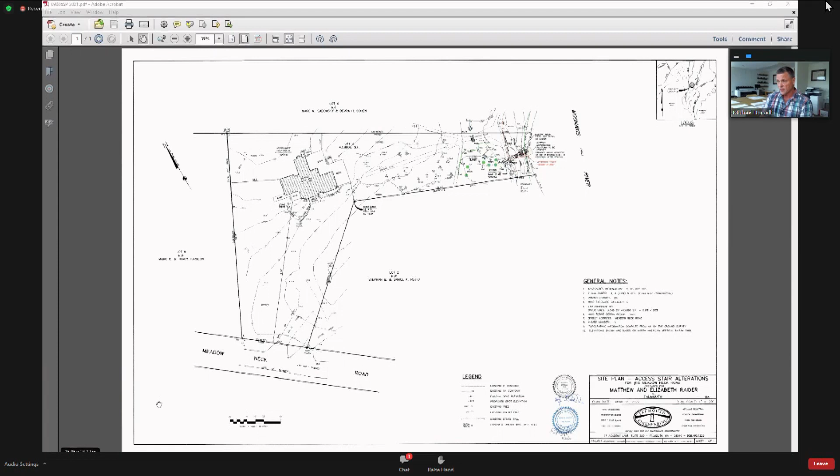The property in question is number 10 Meadow Neck Road. It has water frontage on the Moonakis River. The resource areas include land under the ocean and land containing shellfish. There is a band of salt marsh, which I will point out to you.

There's a narrow band of salt marsh here. There's a sloping landform that meets the definition of a coastal bank. The top of bank is delineated here in red. There's land subject to coastal storm flowage from the blue line seaward. This area on the waterfront edge is also within an area of critical environmental concern.

The balance of the site is just over an acre.

There's a single family dwelling here, driveway, parking, all outside of jurisdiction.

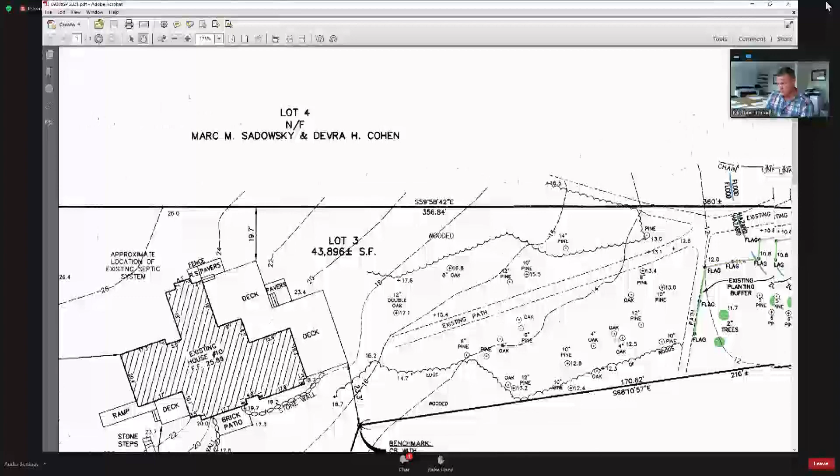Back several years ago, the Conservation Commission issued an order of conditions. It allowed for access stairs from the top of the coastal bank, at the edge of an existing path down the coastal bank, to just the edge of salt marsh, not into the water, because anything seaward of mean high water would require a Chapter 91 license, and Chapter 91 licenses are not obtainable if it's also an area of critical environmental concern in Falmouth, because we don't have a harbor management plan at this time. So the original application was just to gain access to the water for launching kayaks, etc.

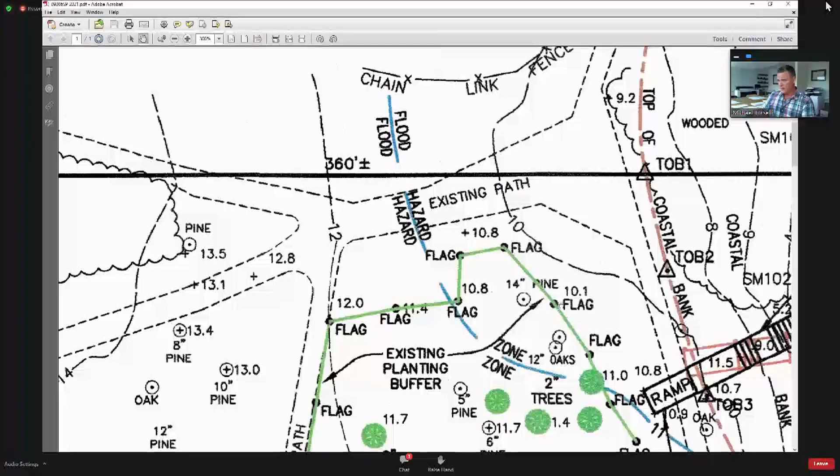The property changed hands. There was no certificate of compliance. We inspected the site for compliance and found deficiencies. We were hired to hopefully get permission to correct the deficiencies. So what I'm showing you here is the permitted alignment in red, approved stairs shown in red, and what was actually constructed in black, including this shaded area that was a platform, unpermitted.

I met with staff on site. We went over it. What I expected to be the result, and what we were anticipating having to do, was make the structure the same size as what was approved, do not allow it to go beyond mean high water, and certainly not to have this platform.

So we're proposing to remove this platform. There's some fringe edges of salt marsh that after this is removed would have to be planted to restore the edges of the salt marsh. This ramp at the edge was not approved, so we're proposing to remove this ramp. That's what this note indicates. And that leaves us with the same size structure that was approved, which is the stairways and the landing at the top. It was just built at an angle from what was the actual approved orientation.

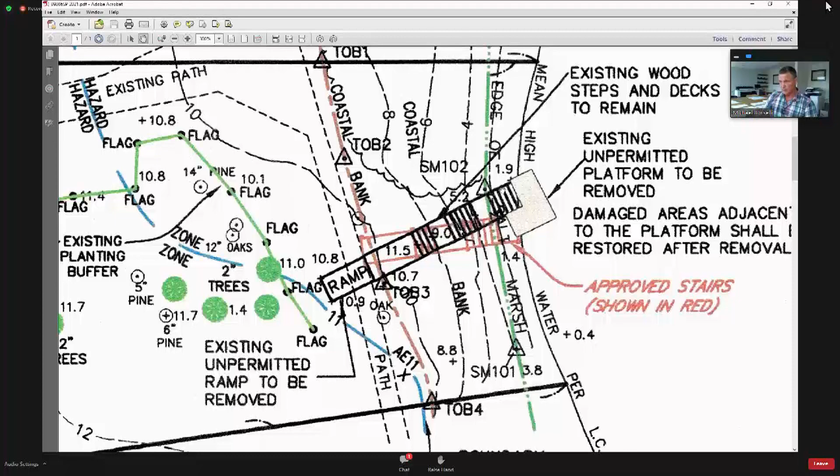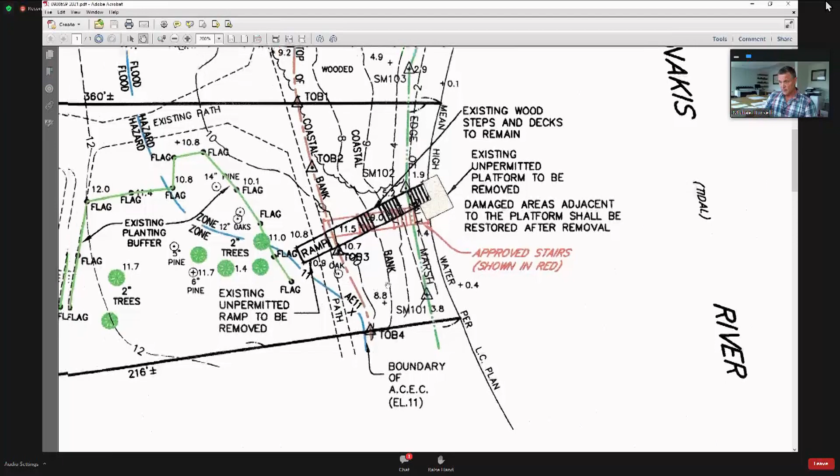So we're hoping that you'll allow us to continue to keep the portion that's the same size as what was approved, but in a different alignment in place, and to remove the portions that were not approved. I think that sums it up, and I'm happy to answer any questions.

Jen, you want to begin? We don't have any questions, Mr. Chairman. The only thing the board, if the board wanted to add some extra mitigation for the ramp, Mike, it's because the ramp extends landward, right? Yeah, the ramp extends landward. Do you know what the square foot difference is from what was approved to what was built?

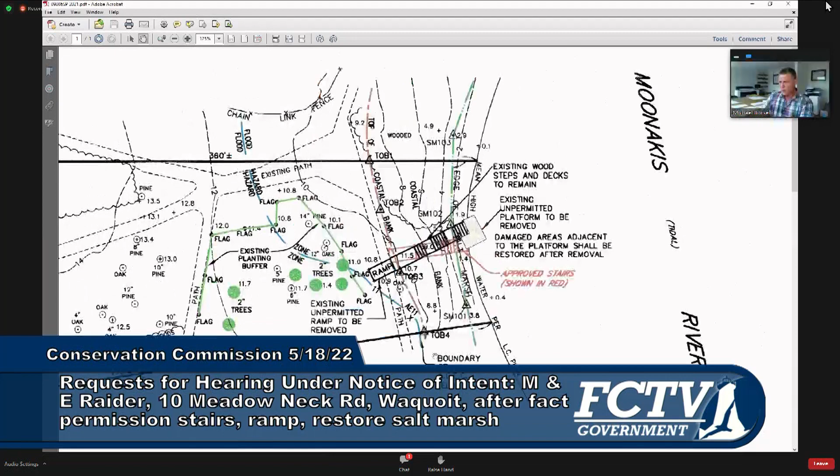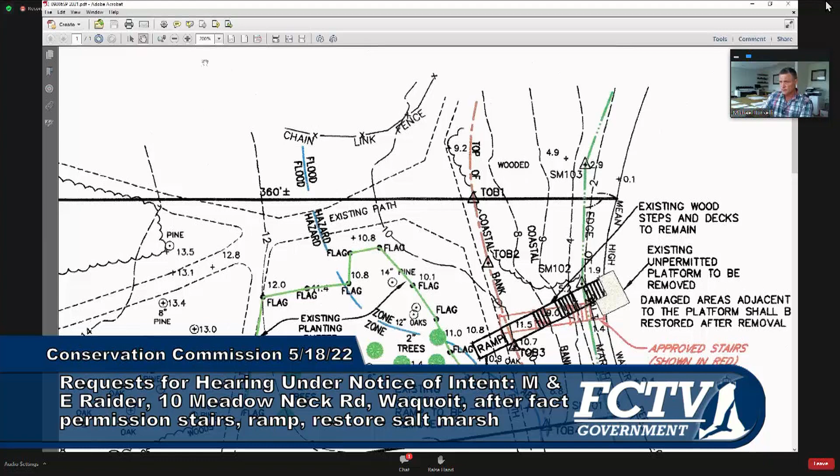If we remove the ramp and the platform, we're effectively the same square footage. So we intend to remove that ramp. You certainly do? We intend to remove this ramp and certainly the platform. Okay, excellent. Thank you. I don't have any questions at this time unless Alyssa may have something. I don't have anything. Thank you.

Okay, so Jen, are you suggesting that they can keep that landward ramp? I would say that if they propose to keep the landward ramp, there should be mitigation attached to it. But at this time, Mike just said they're proposing to remove it. Right, we don't have any intention to keep the ramp. Okay, fair enough, just looking for clarification.

Does this project otherwise meet standards for a certificate of compliance? I mean, it's in a slightly different configuration, but if the board were to approve this, then we could issue compliance on the old order. And then, once everything is removed, issue compliance on this order. Okay, thank you. No worries.

Comments, Betsy? Yeah, so I have no questions, and there'd be no sense to change the orientation right now. That would cause a lot more damage. I mean, it's a good solution. All right, Kevin? I agree. What's there now, with the ramp taken out, is fine. I think it's a clever solution.

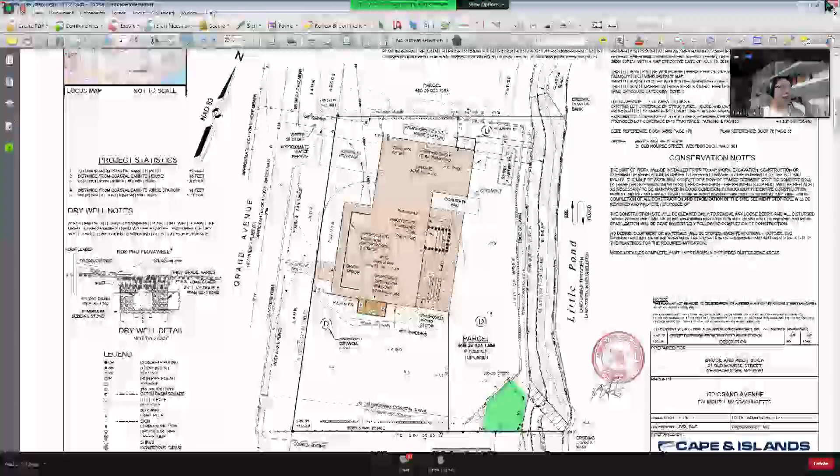So yes, this is the house in the orangey color, and I'm going to draw over where those resources are that are most restrictive. There's an eroding coastal bank to the north on the abutting property, and an eroding coastal bank to the south. The 75-foot buffer zone A's come out to be at this location, which happens to fall within the layout of Grand Avenue, so the entire property is within buffer zone A. The raising of the roof happens at this location of the existing house.

The garage roof will stay the same. There is an existing landing and stairs on the back of the house that's going to be relocated to this location. In terms of footprint, it doesn't gain or reduce because it is an existing deck beneath those stairs. At this location, we have the proposed cantilever deck, and at this location is the proposed rinse station. Overall, there's a proposed 43 square feet of increased development in buffer zone A.

So we're proposing 130 square feet of mitigation plantings at this southeasterly location. We chose this location because it is closest to part of the erosion that's happening, which is also within this subject property. We did receive staff comments, and staff noticed that a tree had been removed somewhere in this location. We consulted with the developer and the homeowner; the homeowner just purchased the property last October and has not done any cutting on the property, so that tree removal must have happened by the prior owner.

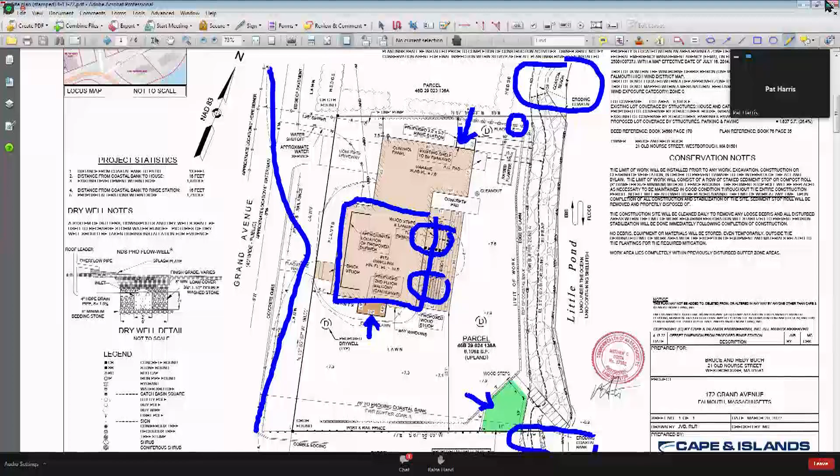So we have a proposed limit of work along the north, east, and south property lines. In addition to the mitigation required for this project, the second improvement is collecting all the roof runoff downspouts, which currently discharge to the surface. We're proposing dry wells to collect that roof runoff. There is no septic system on the site; the property is serviced by town sewer, so there are no changes regarding septic.

Thank you, Raul. Jen?

Staff feels there are no trees at all on that property, so a tree would be beneficial there, Raul, but it doesn't have to be placed where the road and coastal bank are. It can go somewhere else in the buffer zone, perhaps down in the area where you're proposing the mitigation.

I have two additional points. I noticed the vegetation along the coastal bank is being trimmed, so just a note to the homeowner that the mitigation planting is allowed to grow to its full, mature form. Also, since we're working in the velocity zone, note that we're working with a 43 square foot increase, as we've had denoted on the plan the last couple of times for future reference. If that's something you can do for me, that would be great.

So Alyssa, are you looking for a revised plan showing that 43 square foot increase? Sure, Raul, if you could send that over to us, that would be great. Just a comment: the entire property is in the velocity zone, so the table showing the 43 square foot increase implies everything is in the velocity zone. Jamie, may I say something? Raul, I'd like it specifically called out, because you're only allowed a 200 square foot addition in the velocity zone, and this is the first bite of that apple. Understood.

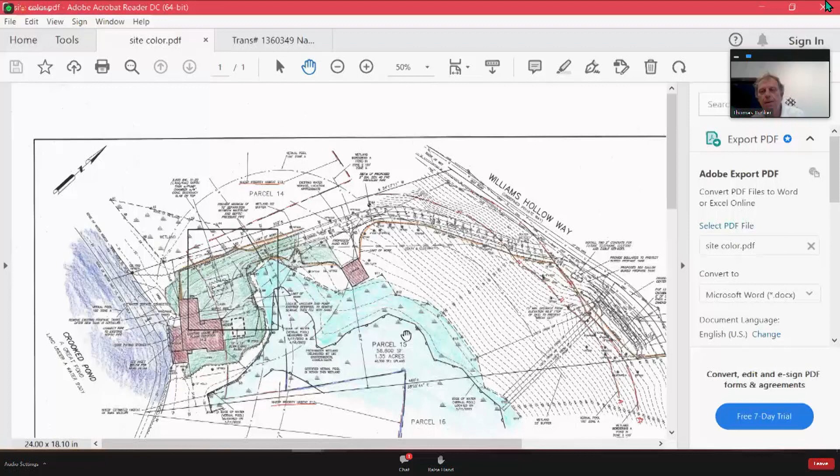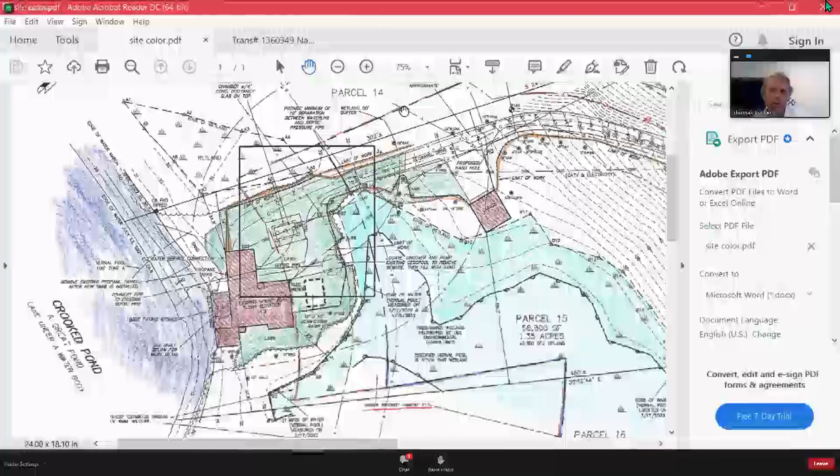So I put it on the plan that this wetland would be considered to border on Crooked Pond, which is in a Zone 2, so it has a 100-foot Zone A, which I've drawn up further inland up through this location. Currently on the plan, nobody knows exactly where the so-called existing septic system is.

It's somewhere out here - could be an old steel drum for all we know, but it was pointed to as being out here somewhere by the owner. Probably never been pumped recently or anything.

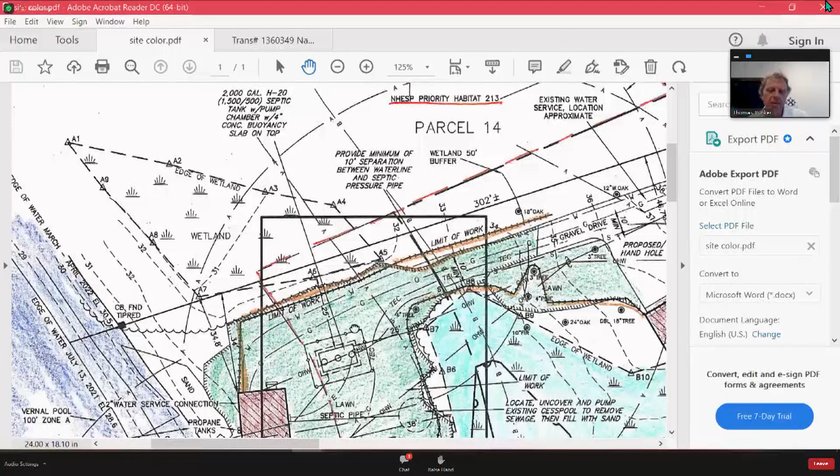So what we're proposing is to discontinue this, pump it out as best we can. I'm sure it's down in the groundwater. Pump it out, fill it, decommission it, and put in a 2,000 gallon H20 1500 gallon septic tank with a 500 gallon pump chamber in one unit right here.

This will depend on the season - if they do it now, it'd be quite a bit in the groundwater. If they waited till July, the water is about 2 or 3 feet lower. In July, when we first came out here, the elevation was 28.6. In March and April, it was elevation 30.5. You can see how the elevation of the pond and therefore the groundwater changes. The best time to do it would be in the summer, when the groundwater would be lowest and there'd be the least amount of pumping into a dewatering basin.

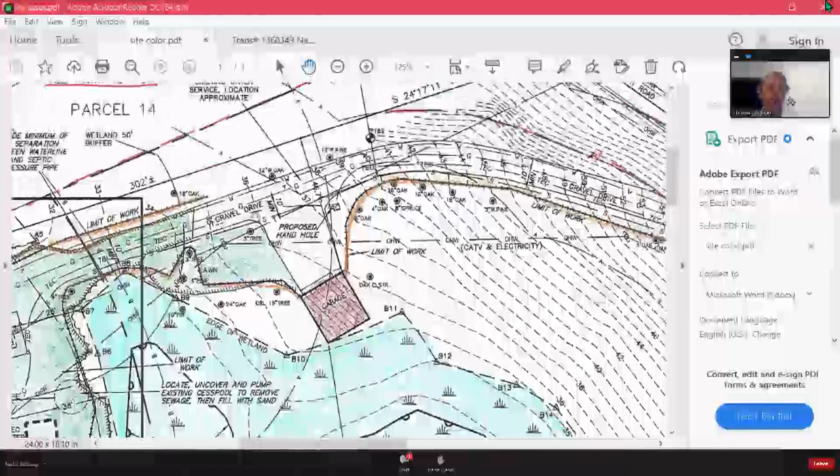There are no plans at the time to change the house at all - this is purely a septic upgrade. From the pump chamber, it's a 2-inch pressure PVC pipe up the driveway, and then over to here.

There's a distribution box up near Williams Hollow Way and a leaching area in this location. The leaching area is 110 feet from the vegetated wetland, and we show the 100 feet to the limit of work, or 100 feet to Zone A. The septic system is 110 feet from the vegetated wetland, and the leaching area is 118 feet from the vernal pool. So it meets the Falmouth wetland regulations requirements for separation, both horizontal and vertical, and the Falmouth health regulations for the placement of a septic system.

This tank, by the way, the reason we have it 25 feet from the wetland is that's a Title V regulation - a septic tank must be 25 feet from any vegetated wetland or water body in that location.

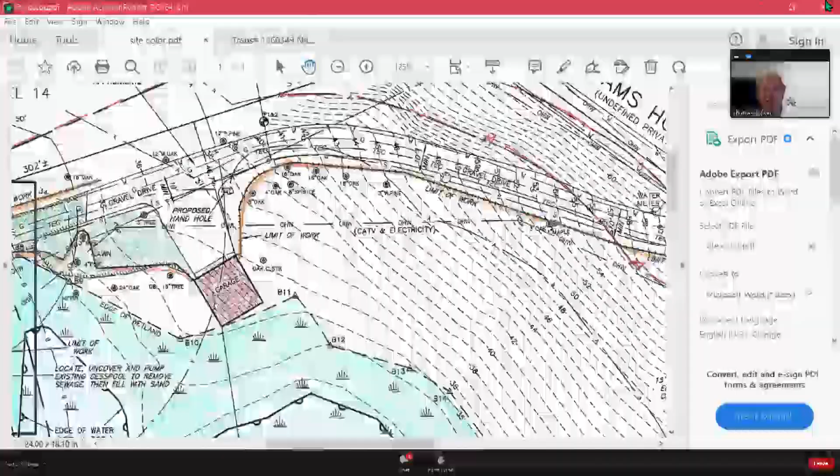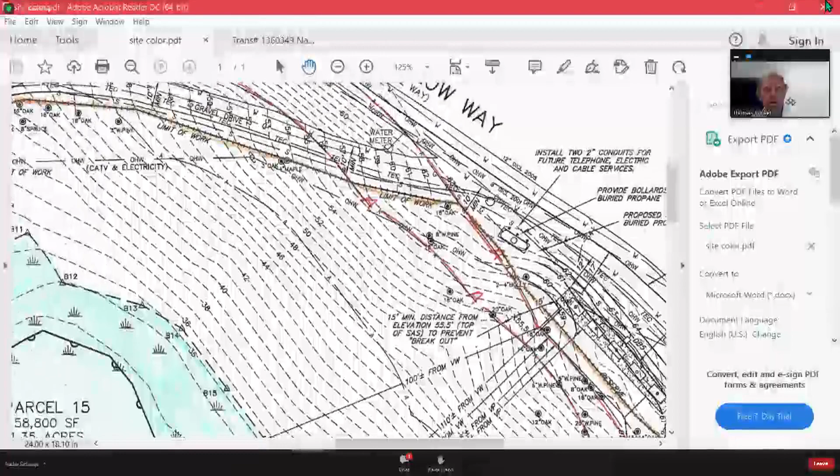When the road is being dug up for the pressure line, they also want to put in conduit from this utility pole here so they can run electricity underground. When that is done, I suppose we'll file another RDA just to take the wires down and remove the poles, so the trees won't get in the way of the wires and the wires won't get in the way of the trees.

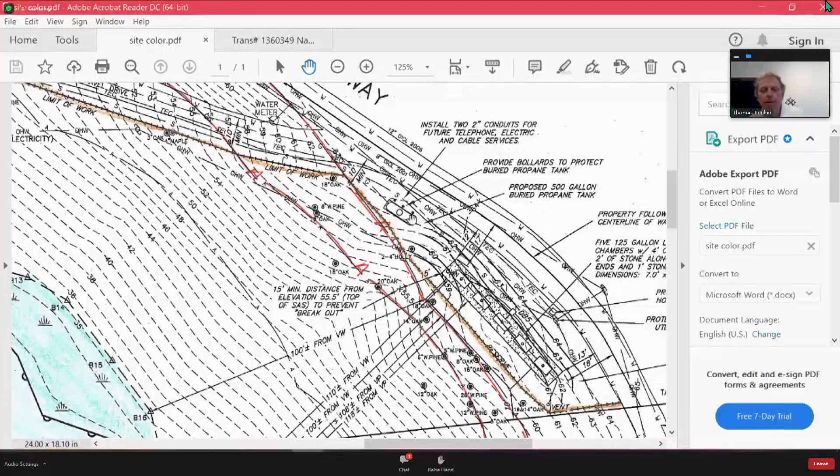And then another item up here by the road is to put in a 500 gallon propane tank buried, because it's too difficult to find a place for a large tank, and it's too difficult to get propane deliveries down that driveway. So I want to put a propane tank up here, protected by a few bollards from any traffic mishaps down there.

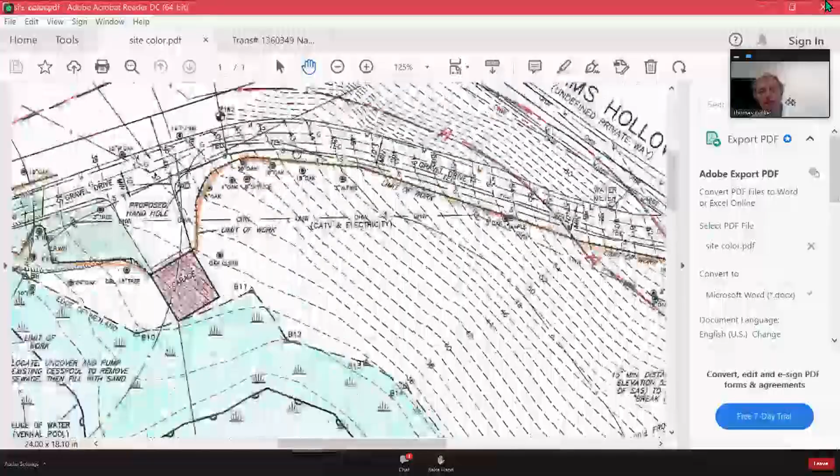So there'll be the septic pipe, a conduit for electricity, and the gas line running down all within the existing driveway. There's no intention or plans to remove any of the trees, and as stated in the narrative, if any trees get too damaged or removed, they'll be replaced in kind, and the surface of the roadway will be put back as good as it is now, or better, as far as a gravel surface to drive on.

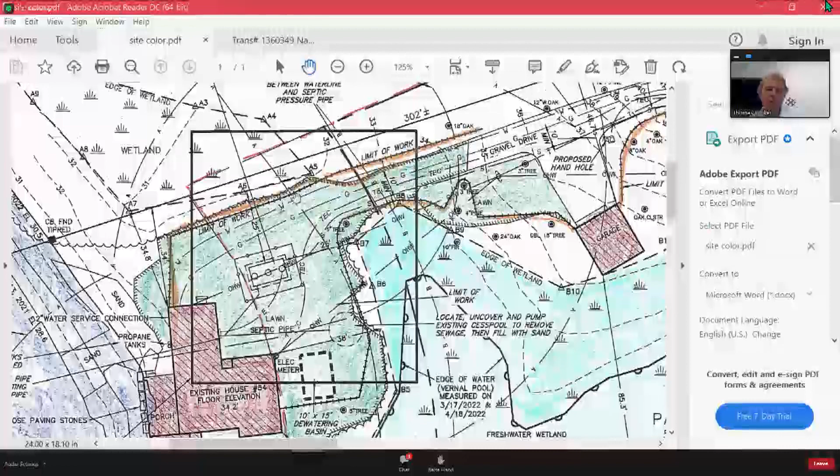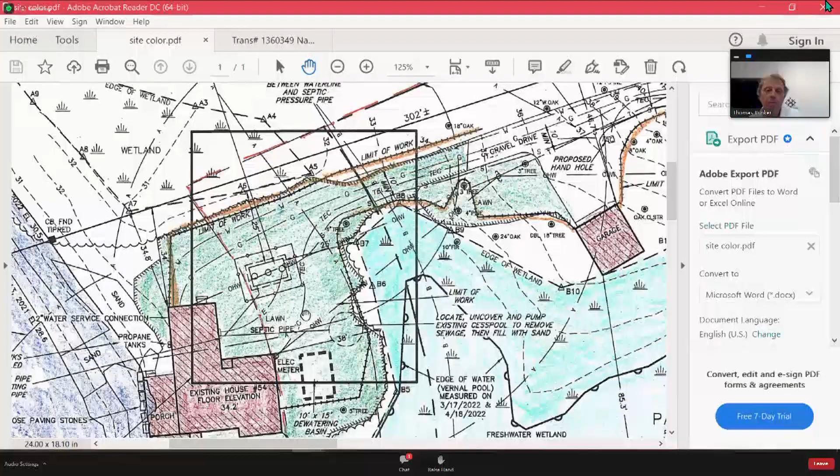And notice that all of this is grass - it's not gravel or any other surface. So the grass surface will be reinstituted where it is now grass. There'll be no increase in impervious surface or surface that will not support vegetation. And that's the proposal.

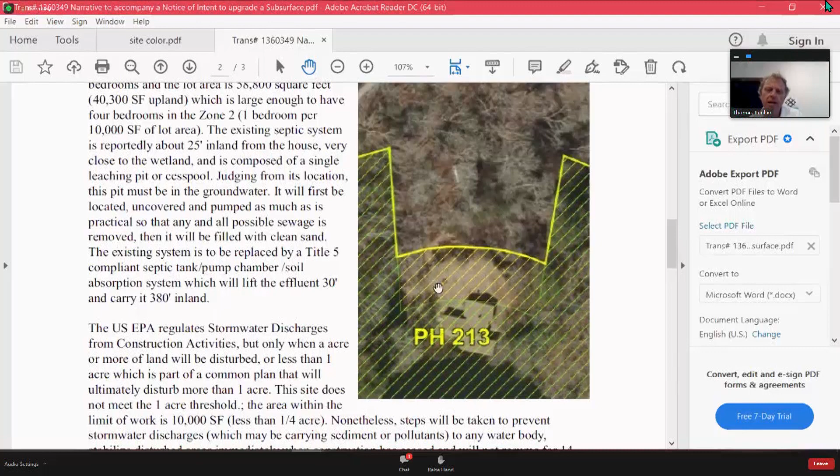Another oddity of mapping - the priority habitat, Crooked Pond, is down at the bottom of this. So the septic tank and leach pump chamber going in the lawn here within the priority habitat, but all the other work will be coming out of the priority habitat and the system up there.

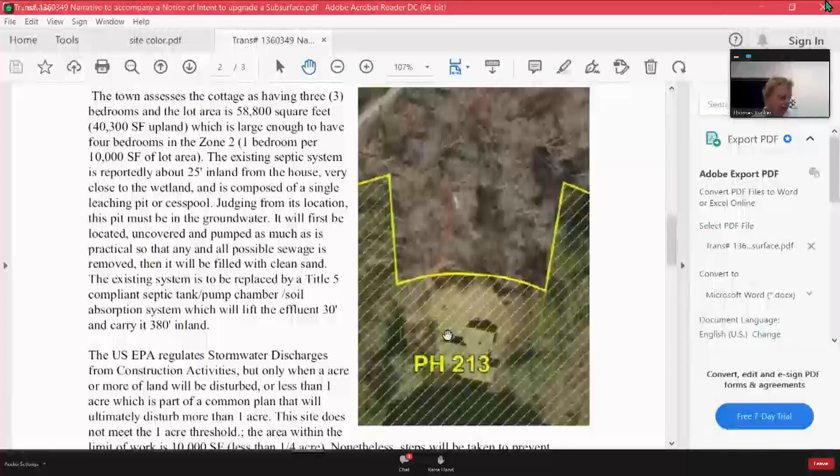It does not have to be, we sent the NOI to the natural heritage people, but it is exempt from review because it is upgrading a septic system within previously disturbed area within the habitat. And so I'll take that down and take any questions.

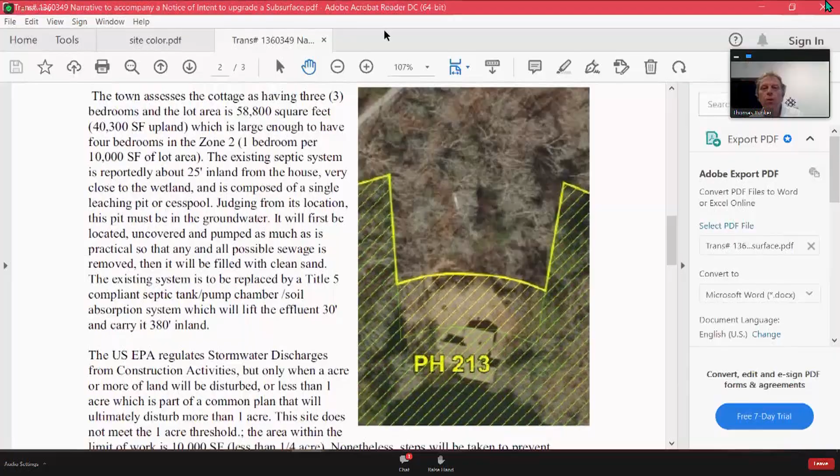Sir, Jen? Yes, Mr. Chairman, I'm trying to promote more. Yep, hang one second, maybe it'll work now. The only concern I have - I don't have any questions - the only concern I have is the placement of the tank. I understand the constraints you're in, Tom, and Tom and I spoke about this. When this house is...

redone, your regulations are going to require the house to be pulled 25 feet back from the water's edge, land under water bodies. You can't move any closer than the present primary structure or 25 feet, whichever is furthest. And in this case, 25 feet is going to be further from that wetland. So I just want to make sure, Tom, that the tank is positioned in a way which will allow this house to be moved back.

It can be, well, two things - yeah, we'll cross that bridge when we come to it. The house is now and will be on posts, which we can put close to the tank. But I also think your regulation does say that an expansion of the structure cannot be closer than 25 feet - it doesn't say that the existing structure has to move back 25 feet. But again, we'll cross that bridge when we come to it and make sure it's done according to regulation.

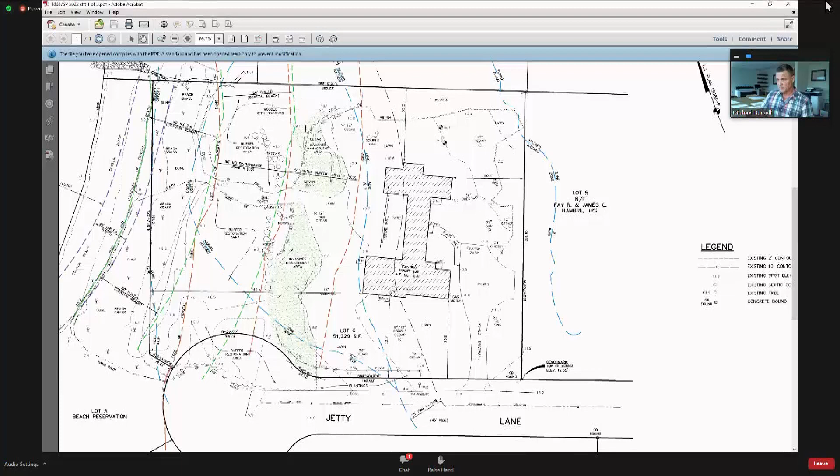All of the work that's proposed is more than 100 feet from all wetland resources with the exception of land subject to coastal storm flowage.

Now the proposed plan shows, for your reference in red, the existing house. I also want to point out where the 25-foot Falmouth designated velocity zone line is. The new house has been designed to meet your standards for construction in land subject to coastal storm flowage.

It does that by first proposing the house itself outside of all FEMA designated flood zones and the Falmouth wetlands bylaw flood zone. A section of the deck is within the 25-foot Falmouth designated velocity zone, but no portion of the structure is in any FEMA designated velocity zone.

The house was designed specifically to shift it back so that the main body of the house proper is in the A zone. The deck and house will be elevated, so the first floor is 1 foot above elevation 16 minimum, or what would be elevation 17. The deck is open pilings with nothing underneath, because a portion of it is in the velocity zone.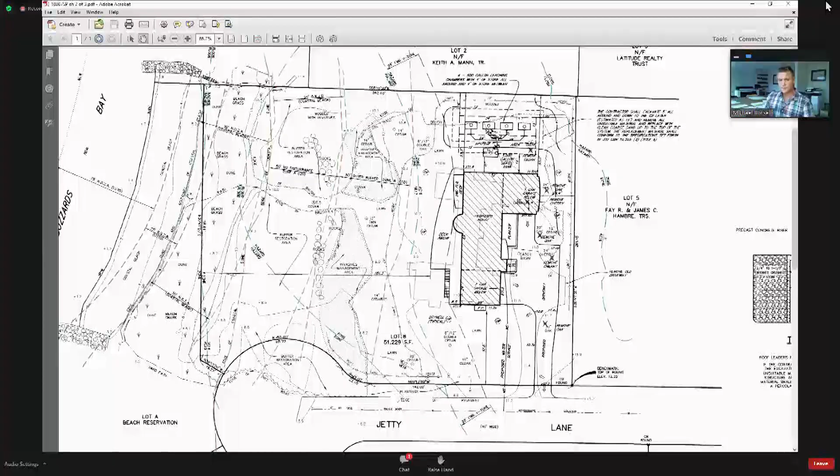I think that sums up my presentation, and I'm happy to answer any questions. Thank you, Mike. Jen, I believe Mike answered the staff questions unless Alyssa has something else to add. I don't. Thank you for the clarifications, Mike.

Mike, I think you alluded to this, but was there a certificate of compliance issued for the invasive work? There was one filed for, but it's pending still. It was just recently requested.

Jamie, I think Alyssa, correct me if I'm wrong, we're still working on trying to meet Crawford at the site. I have met Crawford. We discussed two areas where the plantings weren't doing well, so they're going to remedy that and let me know when that's taken care of. Okay, you're working on that. You don't see there's any issue with it. Okay, good, thank you.

All right, Maury, we'll start with you. I just had a couple questions and Alyssa answered one of them. But obviously this house is going to take some time to build, so the plantings, if they're not doing well now, we should make sure at the end of this project they're doing well still. And we should put the first floor elevation on the plan. It's not a big deal, but it's not on your plan, Mike.

Okay, and the 30-inch oak by the driveway, there's no way you can configure to not lose that 30-inch oak? It's like the nicest, biggest tree on the lot, I know you're trying to swing into the driveway. I'm going to share my screen again briefly, if that's okay. Sure.

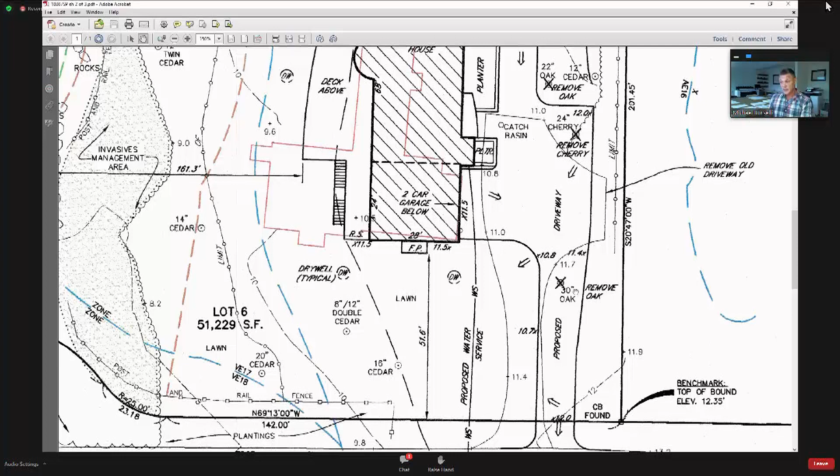I'm not in a position that I can answer that, but my client's in the audience, Mr. Steve Kasuk. That would just, if you can do it, I mean, I know it's in the flood zone, but it's a beautiful tree and will give a lot of shade for that house. So thank you. We'll consider it, we'll consider it.

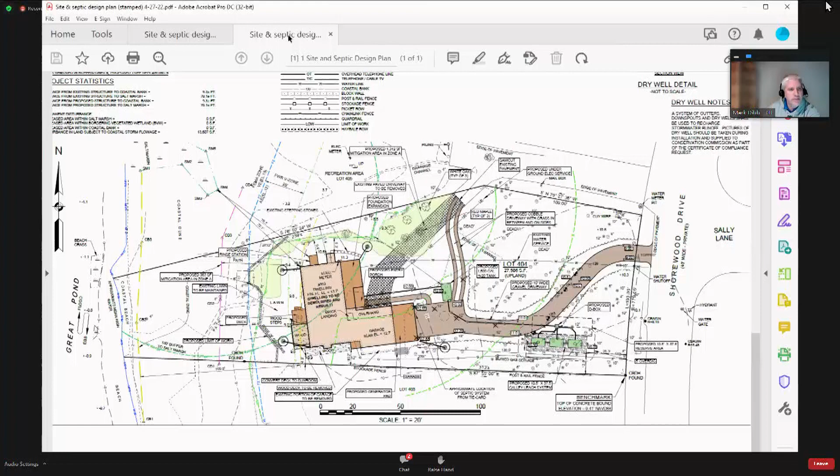And so we resubmitted a revised plan. This is the old plan. We resubmitted an updated plan where we've made a pretty significant change regarding use in the A zone.

This is the A line. We removed that driveway connecting the existing access over to the new access. So we removed that cobblestone driveway, all the work associated with that, which was pervious area around it, as well as the impervious cobblestone driveway. So we no longer have any trespass of vehicles in the A zone.

It all comes off of Shorewood Drive now. And what that did was reduce mitigation requirements, as well as we revised mitigation to now encompass areas of the existing drive that's being removed and areas of lawn, resulting in almost a removal, well, definitely a removal of all impervious hardscape in the A zone. There is still some new proposed structure in the A, but it's a net reduction in the A. We've provided the updated mitigation area.

One thing we did add to the plan are these two small areas of invasive removal. The invasives are overtaking trees and doing what they do in that area. So we have added that in the appropriate notes for that. We do not have a contractor at this time, but there will be a qualified professional to do that work. We can notify the commission once we do have a contractor. And I'll give it off to the commission for any questions.

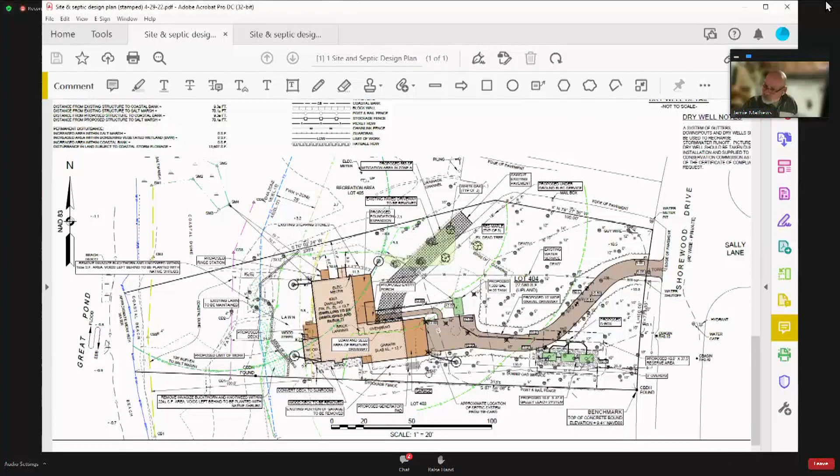Jen? Yes, Mr. Chairman. Hi, Mark. Thank you for those changes. I think Alyssa had one other question regarding the invasive species. Will you be restoring that area with the same species as the mitigation? Yes, we will be. Okay.

Okay, and we'll make a special condition about language regarding the qualified contractor. It will probably have to be approved at least at the staff level. That's all I have, Mr. Chairman, unless Alyssa has something else to add.

I just had one thing, and my apologies if I missed it. We did receive a letter verifying that the existing foundation can handle the weight of the second story, and that is the same individual from the previous hearing when we were going through the whole structural civil thing. So I remember that Gary has verified that this individual is qualified to make that assessment. So just wanted to let everyone know. Thank you.

Okay. All right. Commissioner comments, Pat? No comments. Thank you, Mr. Chair. Peter? No additional comments except for I congratulate Mark in getting all the concerns worked out.

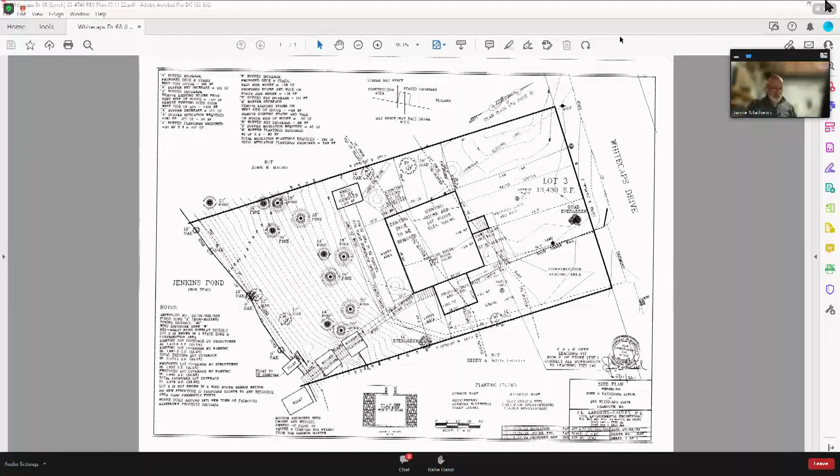Uh-oh. Okay, I stopped sharing, Jack. It's okay, it wasn't you. Yeah, I thought I lost you. No, I'm the one controlling the screen.

I have a couple of questions, Jack, because I'm confused when I looked at your plan and then I'm looking at the architecturals. A couple of things: you're not raising the whole structure, because if you look at the existing house pictures and the architecturals, it's completely different window sizes and everything in the front. So is the whole house coming down, or are you just doing the addition?

They're going to do a major facelift of the whole house, but the deck is to be removed and the first floor is going to be extended. Is there going to be a second floor on the house? No, no second floors. What you're looking at in the architectural plans is a Scrivener's error because the designer has said it's a first floor. He notes first floor on two sheets, so that's clearly an error on his part.

May I interrupt? The section shows it as a second floor. Yeah, the plan's wrong because you're not proposing a floor addition, correct? I'm sorry, say that again please. You're proposing a second floor addition? I'm sorry, yes, I'm confusing first and second floor. You're absolutely right, there's a second floor addition. I apologize about that.

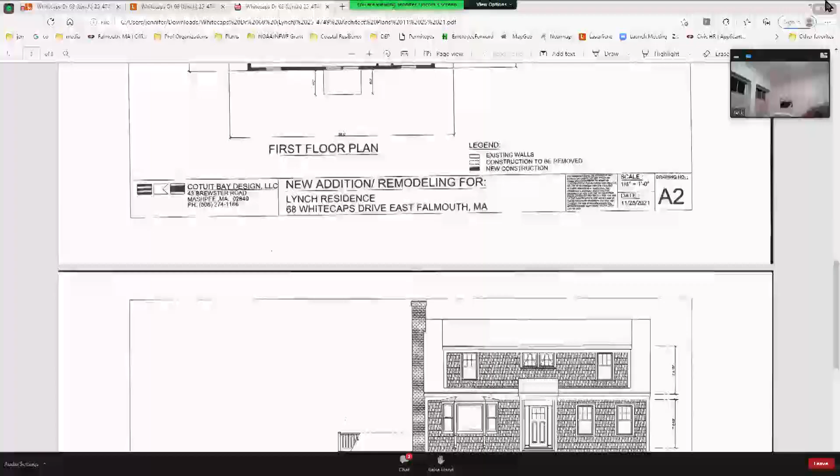Yes, okay, those are the first floors. So this is the rendering, so that's what it was like. Jack, watch my screen. So this is what we caught, the different orientations of the windows that were there.

So down here, that lower level, that walkout level, is that going to be a full foundation? Is that just going to be like a frost wall? It could be either. Actually, it needs to be a frost wall. I should probably let the architect explain that, but as a minimum it should be a 4-foot frost wall. Is the architect here? No. Okay.

I just want to know how much excavation is going to be done on the property, Jack. If you've got this existing basement right here, are they taking this wall out, making a frost wall and just making this one room, one level? Or is this going to remain a wall and this is just going to be a room?

This is the way I envision how it has to happen. I think they have to take the deck down, and in the same footprint, put in a 4-foot frost wall, which will be about a foot above finished grade. You then build on top of that frost wall a traditional wooden wall, which will go from the basement level to the underside of the first floor extension, or the former deck. That's how I see it. And then they would raise the roof over the existing main house and put a second story on.

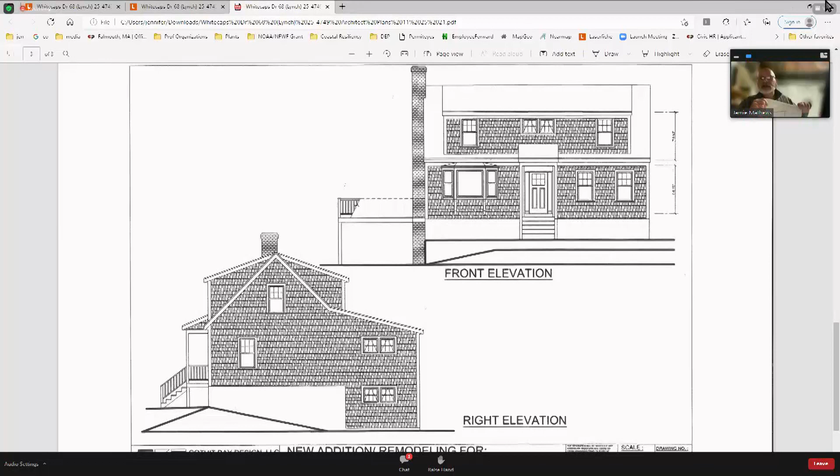Okay, Jamie, you want to see anything else on the architecturals? No, I just want a clarification. I don't necessarily have a problem with the second floor, but it doesn't say that, so I don't want to beat it to death. But it does bring us back to our concern, and forgive me.

Back to our concern about a second floor and the foundation being ample to support it, and then them coming back later saying it's an emergency because the foundation isn't adequate. So the application should state that they're adding a second floor. Therefore, we're going to require that engineer's stamp that says the foundation is adequate, so that nobody can come back later and say we didn't know, now it's an emergency, you have to give us permission to do this today.

That's a fair statement. And quite frankly, I did ask the architect if they were going to raise the building. They said no, so I didn't go any further. But now you get into the semantics of raise, R-A-Z-E, versus raise, R-A-I-S-E, or simply raising the height of it. So again, I don't have a problem with the second floor per se, I just want to be clear. I've said enough, I'm moving on. Sorry, Jen.

It's okay. If I understand correctly, then what we need is a certification by the structural designer about the foundation, and clarification as to the footing under the converted deck, and a full set of plans. Is that a fair statement? Correct, please. And again, you said there's no increase in bedrooms, correct? That is correct. Thank you.

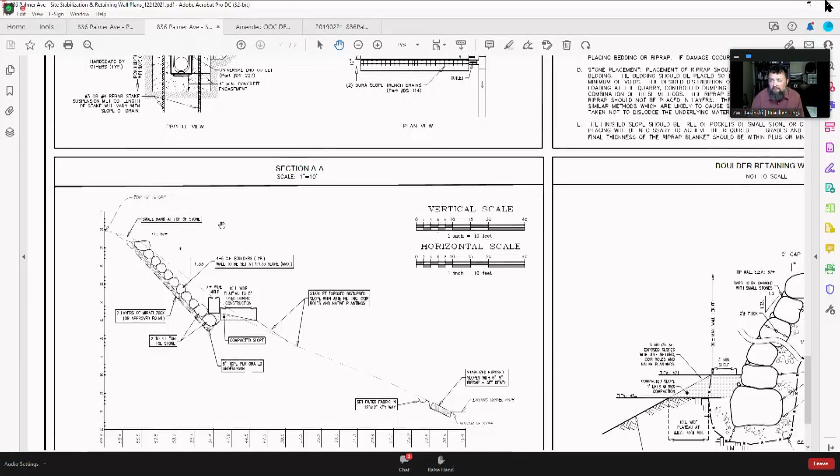Again, the means and methods for this wall was to construct a 10-foot path through the trees, through the access, in order to create a stable platform to toe the boulders into the slope, and then lay the wall back against the slope. Again, our intent here is not to build a full 80-foot wall. I mean, we did show this on the plan as a worst case scenario.

We are here to try to field fit this in to minimize the amount of disturbance to the slope, to minimize the amount of wall. Again, on our side, we're not looking to add weight to the side of the wall. We're just looking to stabilize this slope.

We had talked initially about putting fill over the top. A concern that came back from the geotech on that is not being able to stabilize it and get it to cohesively blend into the slope and stay. He was concerned that if that fill got soaked or wet, it would potentially slump and lead to more sediment washing out and eventually ending up in the rain garden at the bottom.

So again, that just recapped the design. We're also here to address the cease and desist that was issued as part of the project. Again, we did go out, Mr. Delau did cut the trees down. These were the trees that were initially identified on the initial request. Just to recap, there were 9 trees inside the jurisdiction of the commission and 2 trees outside.

Again, speaking for AutoCamp and everything, they're looking to minimize the amount of disturbance. They didn't want these trees to come down. This was only because it was the only means and method we felt was safe to protect the safety of the general public, and the safety of the contractors to actually construct something on this slope.

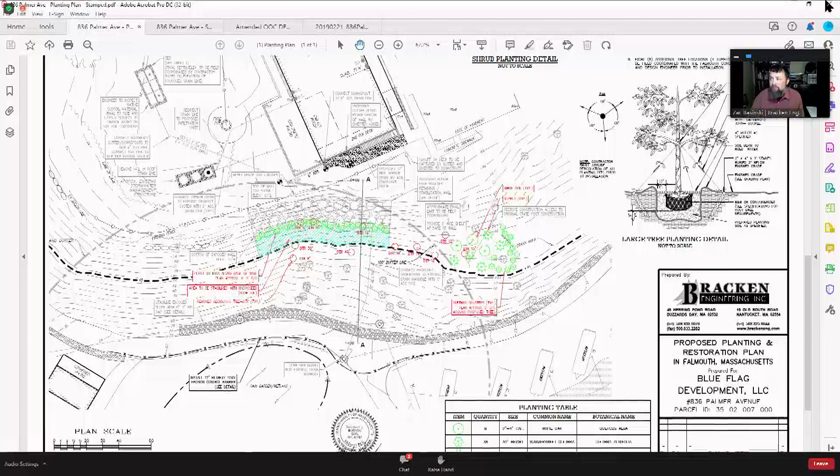Again, trying to install all these trees on this slope would be a detriment to and destabilize this further. So again, we'd ask that if this is amended, we work with staff to find acceptable areas on site to put those in. With that, Mr. Chairman, I'll turn it back over to the commission.

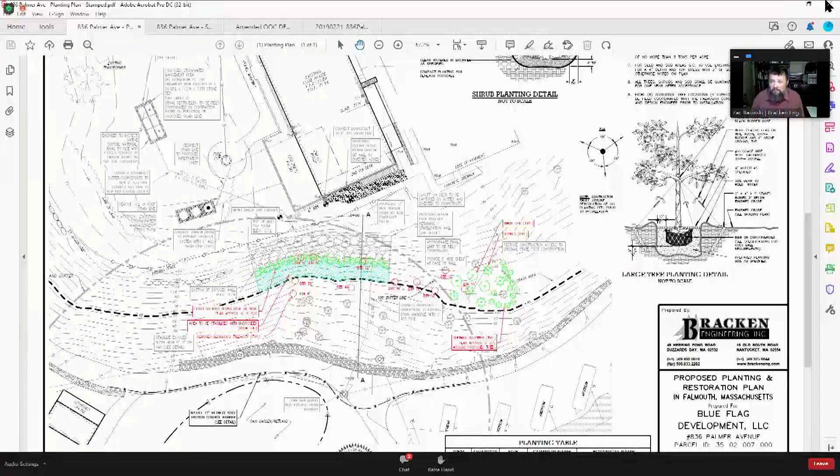Okay, I'm going to be the bad guy here because it's my turn tonight. So you basically just ignored all the order conditions that you were issued and just went the way you wanted to go. And now you just want us to give you permission after the fact.

I'll be honest, it seems like that, but it wasn't. It was an oversight on our part. I can't apologize enough for it. In my career, 23 years of being a civil engineer and being a professional engineer for 15 years, this got past me, and I outright apologize for this, sir.

In your application for this amendment, you don't include, at least I don't see it in my package, your original design. So I don't see any cross sections. I don't see how you're wanting to do it. And if you want me to go back to 2019, forget it.

No, the original design, the original means and methods, was submitted back in February for that plan. Yeah, it should have been submitted with this too. No, I apologize about that, sir. Jen?

Yes, Mr. Chairman. Your turn, I mean, there's not much for the staff to say. I think Alyssa can kind of detail what happened.

So right now in the proposed plan, what we actually have is there was a gutter system installed on the south side of the building. These were the original downspouts on top of the building that overflowed. They cascaded down onto an upper deck, which then overflowed and caused the erosion in this area on the south side of the building. So what we've done works under most normal rain events. It's those catastrophic events that aren't planned for that overtopped it.

So we have since put a gutter on the side. There's a trench drain at the bottom of the stairs to capture any runoff. And then around the patio, there is a double-rated trench drain that was installed. That stormwater is then captured. All the roof runoff is put back further away from the slope on this side. And then an existing drainage system only takes the runoff from this small portion of the patio.

Again, as previously reviewed with the commission when we amended the permit originally, we did have a geotechnical engineer go out. They installed monitoring wells along the south side of the building. One of our initial concerns was whether there was bleed off or a subsurface perched water table. They came back, this was bone dry. There was no hydraulic pressure on the back side of this wall as a result of the drainage system, and there is no perched water table here.

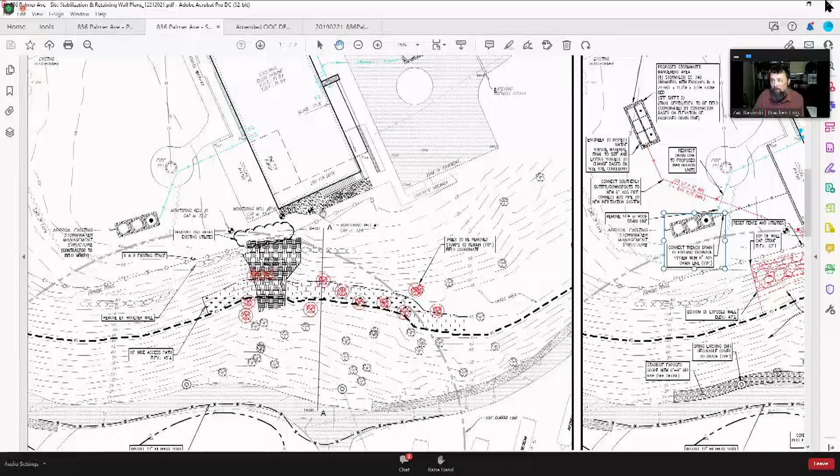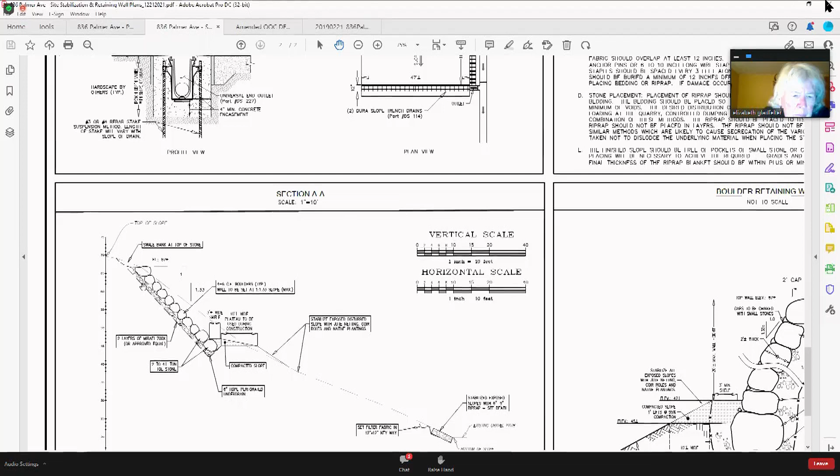Again, we do understand the concerns about the weight of the rocks and everything, but we don't feel there's another means of being able to stabilize that slope given the steepness of the area. This design has been put in to create a shelf to toe these rocks in and then build a rock wall back up. This is not like the rock wall installed by the previous contractor on site. When they did that, they just laid stone right at the top without bedding it, and unfortunately the water ran through those rocks, which caused them to slide down the slope.

Our end goal here is to get this stabilized, to protect the safety, health, and welfare, and then work with the commission to rectify our bad doings with these trees. Again, we don't want to see the trees come down. Mr. Tully can attest to it. The whole intent is to keep this as natural as possible. Again, we're just working with the unforeseen circumstances on the site.

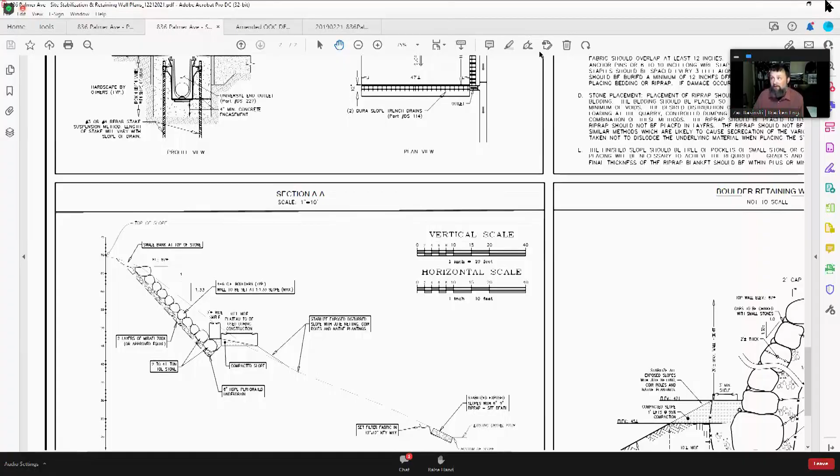Again, we do apologize that we missed the special conditions on that, and I can't say sorry enough for that to the commission. We do respect your opinions, and if we could address them with this, I would. I'm a professional engineer. Anything I put out there is for the utmost protection of the safety, health, and welfare of the general public. That's my number one goal. I'm ashamed and embarrassed that I'm here on these terms. I can't say sorry enough.